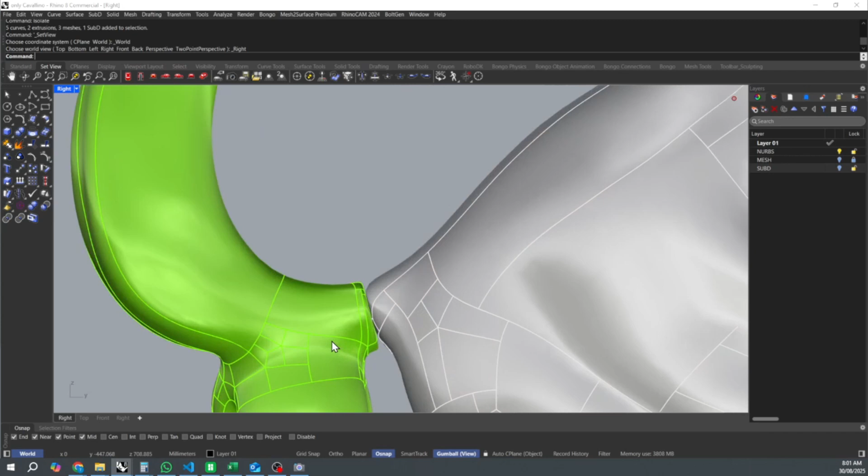So I actually made the mesh transparent, as you could see before, and kind of using the mesh over the SubD and just pushing and pulling out, in and out, to get the detail. Quite a careful process, but the SubD makes it quite easy to do, so that's great.

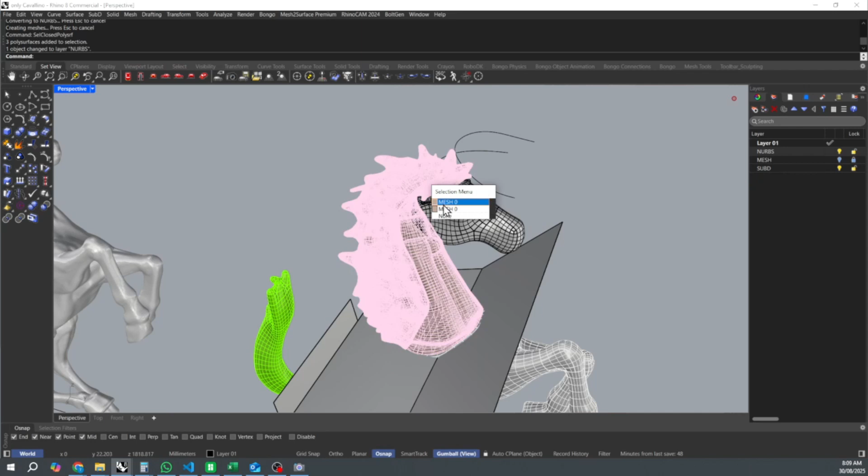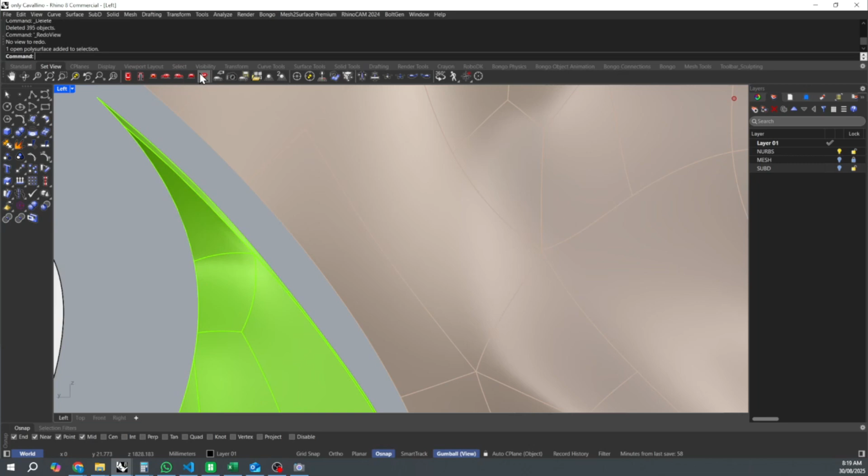So once I had converted all of my SubDs into NURBS, and you'll notice I was using my layers quite well. I have a mesh, SubD and NURBS layer. I trimmed the ends off because the ends tend to kind of round off a little bit on SubD. So I trimmed the ends of NURBS, and then I went about using blend surface and sweep to join the different NURBS areas together. This was a little bit tricky.

I think it wasn't the best process looking back on it, but it was the only thing I could think of at the time. That said, I got there in the end, but this was the most time-intensive part of the job, and obviously the least accurate, I suppose. However, I was still constantly turning the mesh on and off to check.

Now the ears, I wasn't that happy with the conversion I'd done on the ears. They'd lost their detail. So shortly you'll see I split the ears out from the mesh once I finish patching these holes, and do a QuadRemesh on the ear, and then position them. And I spent quite a long time working these to get them looking right.

Now look, this model, I will send this model to the person that made the inquiry, but I hope they will just use these techniques as a foundation to do the job for themselves, and obviously take a bit more time. So I had to delete this left side ear, the original, and patch the surface before I could then boolean in my rebuilt ear. Now I used Cage Edit to pull it into shape, and then of course Boolean Union just to join it all together, resulting in a closed solid polysurface.

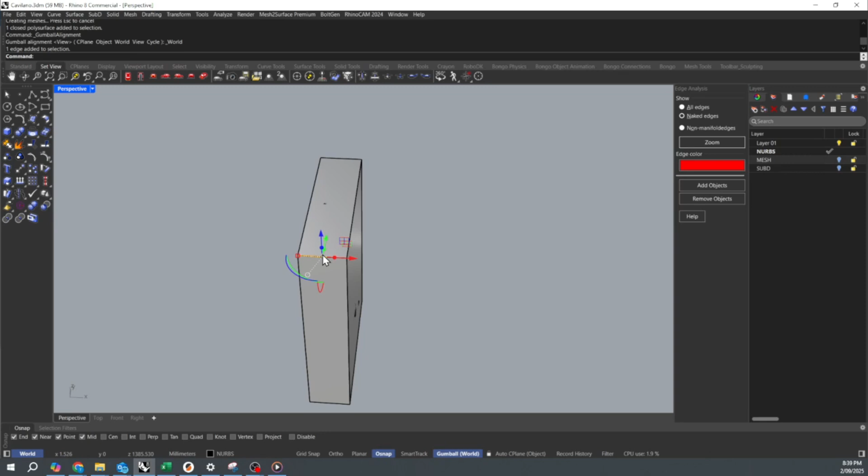So I thought I'd take this a bit further into an example of milling. So I created a bounding box and moved the bounding box over to the halfway point. Now if you were milling this for fibreglass, you would need a split mould, which is what I believe it's being made from. So you can see I'm identifying the undercut areas and splitting them out here. Just checking it all out. So now you can access those areas.

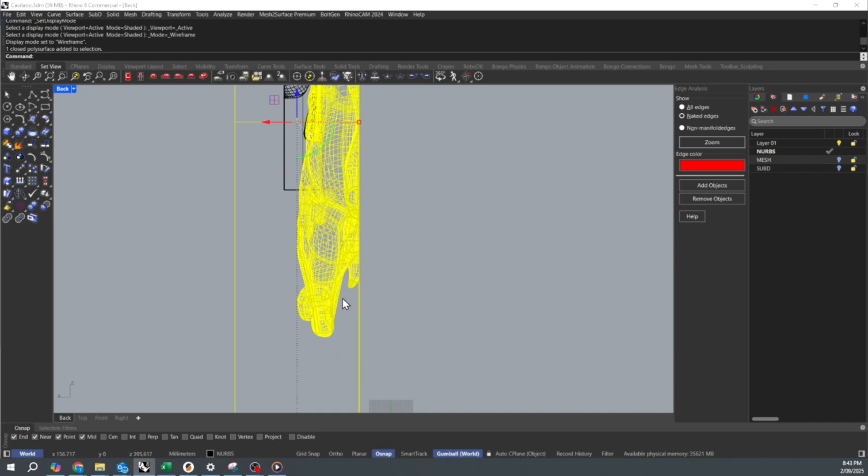I didn't do a draft angle analysis, which if this was a real job you'd have to go through and do a draft angle analysis, and any areas where there are undercuts, you'd have to sort that out too. I created some locating bolts, just drawing holes and then doing the wire cut command, but you could also do the make hole command.

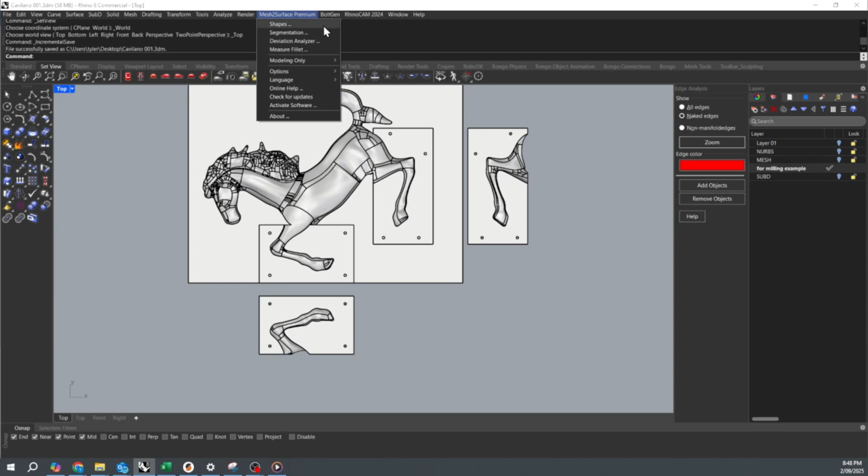Then I opened up RhinoCAM, which is what I use for this kind of job, as my business does do a fair bit of CNC milling and fiberglass fabrication. And I just did a simple roughing pass followed by not a finishing pass but a cleanup pass.